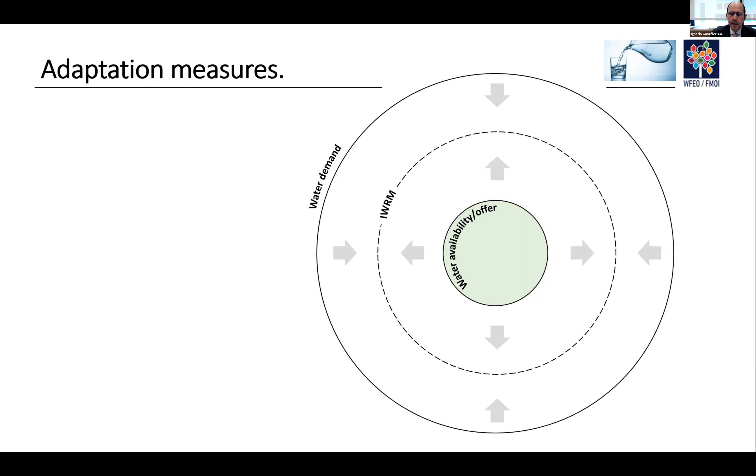If we focus on adaptation measures related to water supply demand, we can say that climate change will affect water supply in terms of availability, quantity, and quality. Demand will be affected mainly by world population growth and the consumption patterns of current development model. The balance between a reduced supply and increased demand can only be achieved through adequate planning and integrated water resource management. But going further into integrated management, it should also be multisectoral, including soil and land management.

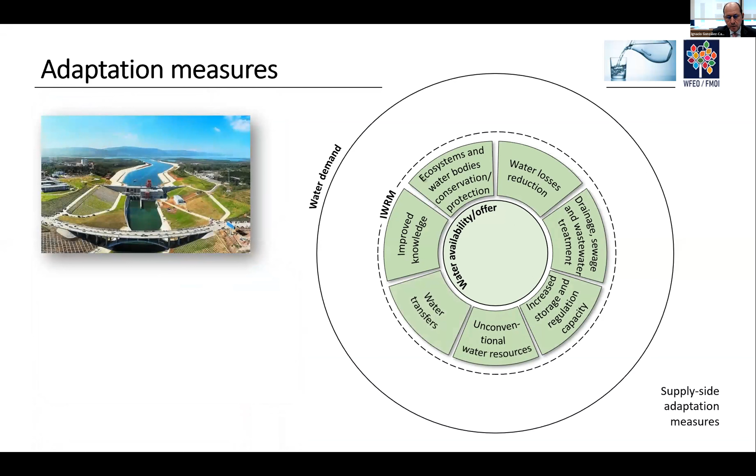7 supply-side adaptation measures have been identified: improved knowledge, ecosystem and water bodies conservation or protection, water losses reduction, drainage, sewage and wastewater treatment, increased storage and regulation capacity, unconventional water resources mainly desalination and reuse, and water transfers. Also, virtual water transfer is important here.

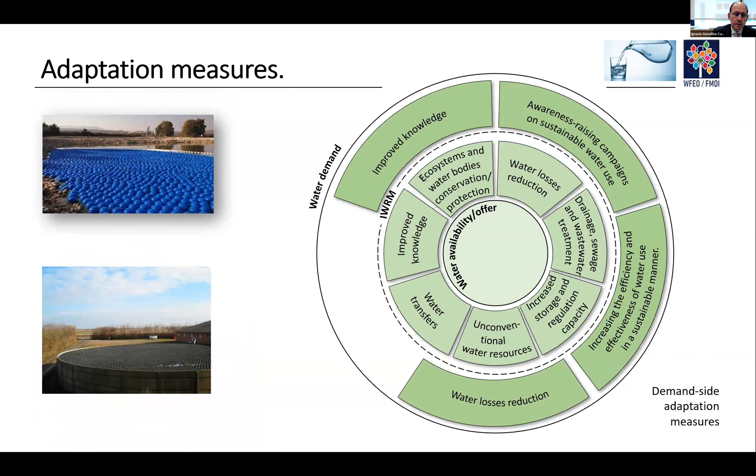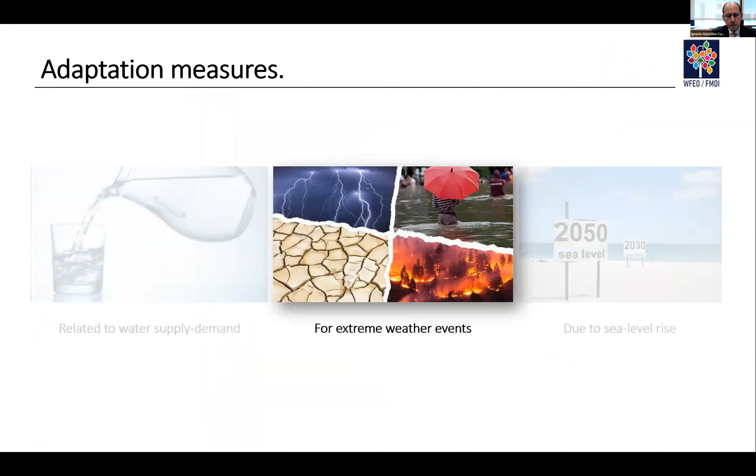5 demand-side adaptation measures are proposed: improved knowledge or increased knowledge, awareness-raising campaigns on sustainable water use, increase the efficiency and effectiveness of water use in a sustainable manner, water losses reduction, and disruptive breakthroughs that promote lower water consumptions. This last measure is perhaps the most important because these advances make it possible to decouple development from water use and increase the planet's biocapacity.

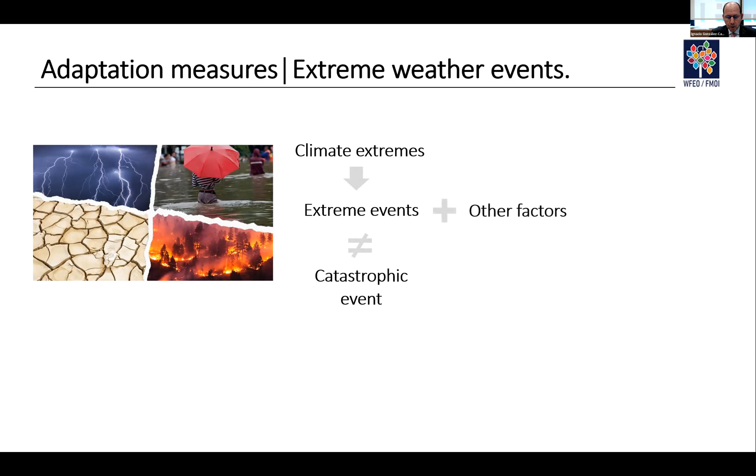Regarding the adaptation measures for extreme weather events, I just want to highlight that catastrophes are increasingly seen by society as the public face of climate change. Climate extremes cause extreme events, but whether a meteorological phenomenon is catastrophic or not does not depend exclusively on the extreme event value taken by the climate element. Other factors, mostly caused by economic and social reasons, are the ones that can condition the catastrophic nature of an extreme phenomenon.

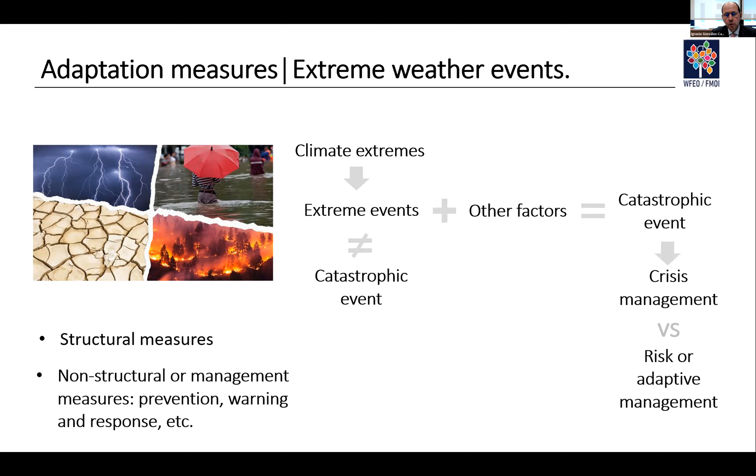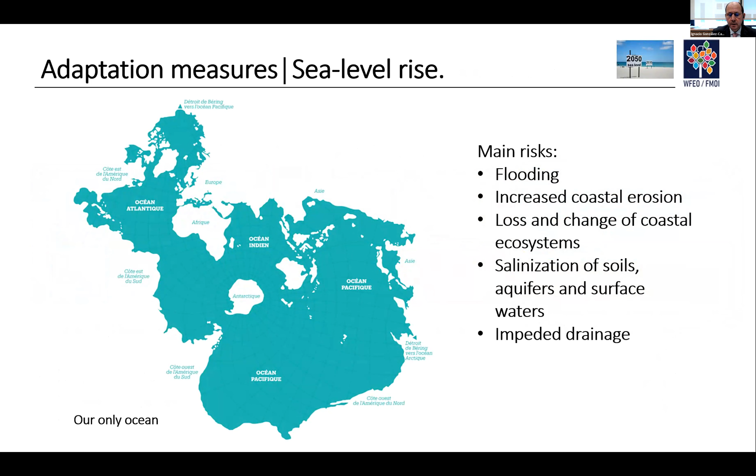Traditionally, these extreme events have been treated as an emergency or critical situations. These policies are changing worldwide, shifting from a crisis management approach to one based on risk and adaptive management. Floods and droughts must be addressed with structural and also non-structural measures, and it's also important to recover the connection between rivers and floodplains. More details can be found in WFEO publication Best Practice on Droughts and Flood Management Engineering Contributions.

The last measures addressed are those related to sea level rise. Given that sea level will continue to rise regardless of the mitigation measures undertaken, adaptation seems to be a priority. It should be noted that 10% of the world's population lives between 1 and 10 meters above sea level.

If we focus on small island developing states, it should be noted that in addition to facing rising sea levels, they also suffer from water insecurity that will increase in the short term. Therefore, international collaboration to address climate change in these sites is essential. We cannot forget that climate change must be a shared challenge.

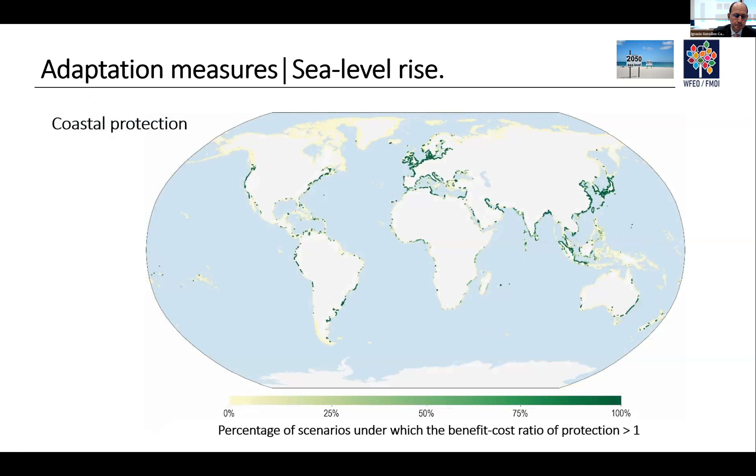Adaptive response can be categorized into four groups: coastal protections, advance, accommodation, and retreat. Usually these measures occur in combination with each other at the same coastal location over time. Coastal protection measures may be cost-effective for cities, but not affordable for rural or poor areas.

These adaptation measures bring multiple benefits, but we must build infrastructures from a different perspective, putting more value on the relationships with the rest of the stakeholders, such as the environment. Therefore, the design step is fundamental. We must design resilient and non-rigid infrastructures, identifying vulnerable areas and testing our proposals for adaptation to climate stress tests.

The circular economy of water is important, but it's also relevant to consider the life cycle of the materials we use, defining at the design stage the dismantling of the facilities at the end of their lifespan and their possible subsequent use or recycling. We are also committed to carbon neutrality, so we need to incorporate new solutions to transform the development model. Thank you very much, José.

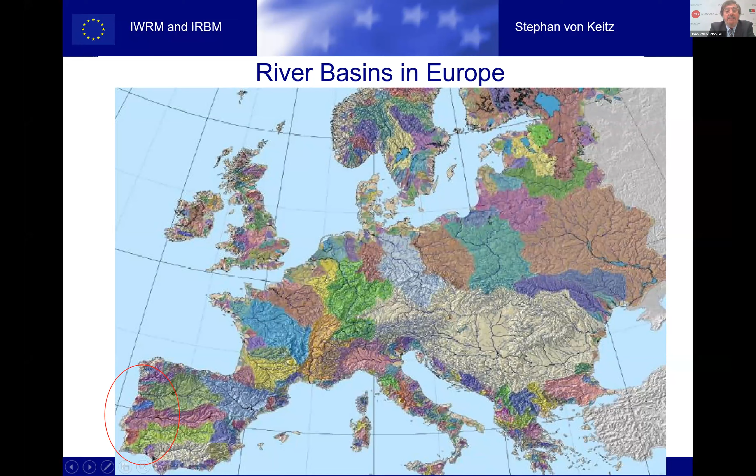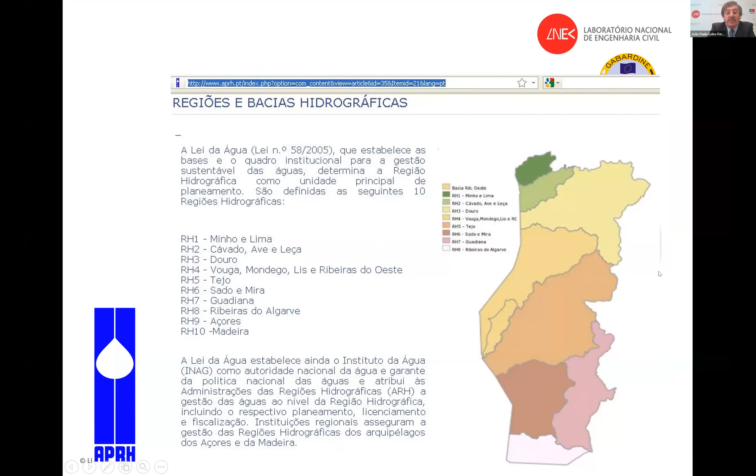You are seeing here the member states, and I will try to address this part of the Iberian Peninsula. This river here is the Tagus River, or Tejo, or Tajo in Spanish, Portuguese Tejo, in English Tagus. It's 1,000 kilometers long. Not just the river basins, but also, as we are sharing here for Portugal, several of our regions and rivers, some Portuguese only, others shared with Spain, but also groundwater.

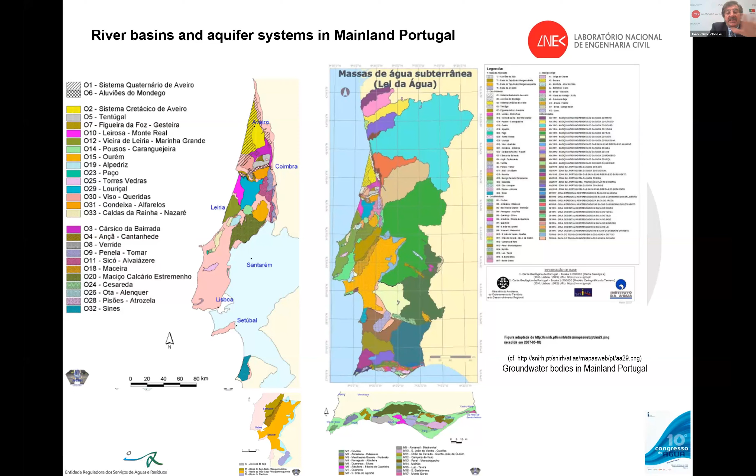So a lot of what I'm going to tell you today is related to water resources up in the open sky, precipitation on the ground, surface water, and also infiltrated groundwater. All that makes our groundwater circle. So we have like two-thirds of our country's fracture media, but we have one-third with large aquifers. This is the largest aquifer in the Iberian Peninsula, like 8,000 square kilometers in the Tagus left bank of the river.

You see here the region of the Tagus, Ribeiras do Oeste, financed by the European Union. What is interesting is that we have a role, a protocol, the guidance document 18, that says for all these water bodies, surface and groundwater, we are targeting to have an assessment, but also conclusions and rehabilitation.

Our target is by 2027 to have all groundwater and surface waters in a good status, both quantitative and qualitative. I've done my PhD in Berlin, so I'm a mathematical modeler.

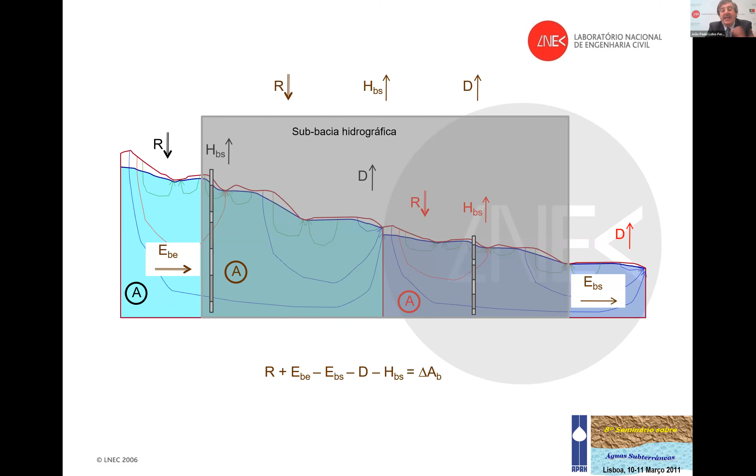You see here a watershed, with precipitation, groundwater, overflow, and runoff. What is occurring these days is the precipitation pattern is changing. You have much more concentrated precipitation causing floods and less groundwater recharge. So the availability of water is probably the same—the water will not go to another planet, it will stay on planet Earth. So planning is a fundamental issue so that we can do a good job by 2027 and later.

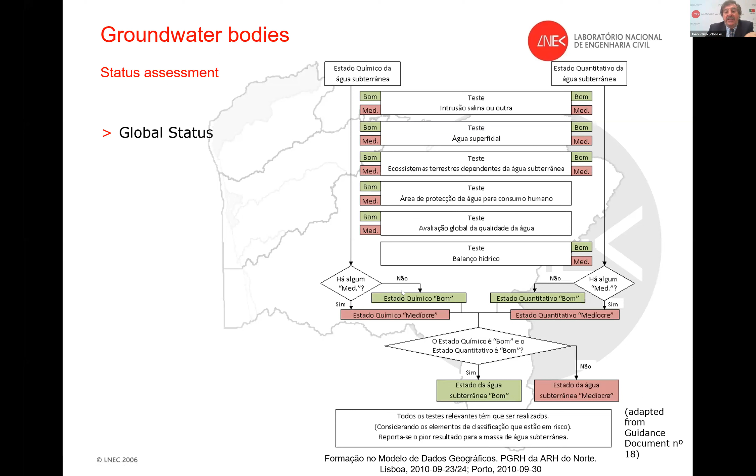So what is this guidance document saying? We're going to assess all the water bodies from the chemical status, like groundwater, or the quantitative status—as we've seen by Ignacio, you also test saline intrusion. Then you say if this water body is in good status of quality or not. If one of these tests is not good—water for consumption, global quality, water balance, if the groundwater is declining—then this water body, surface or groundwater, is not in a good state, and we have to do something to overcome this. This was the target of those plans.

Of course, we are doing that with data, structure, models that we have, and we address this in different types of issues. For instance, related to the Tagus watershed, we had like 1,500 wells where we have reached in depth, so in 3D, surface and depth, what is going on. Then you have some areas in red where you have a decrease of the groundwater table of more than 100 millimeters, and then we have to do something to see why this is happening.

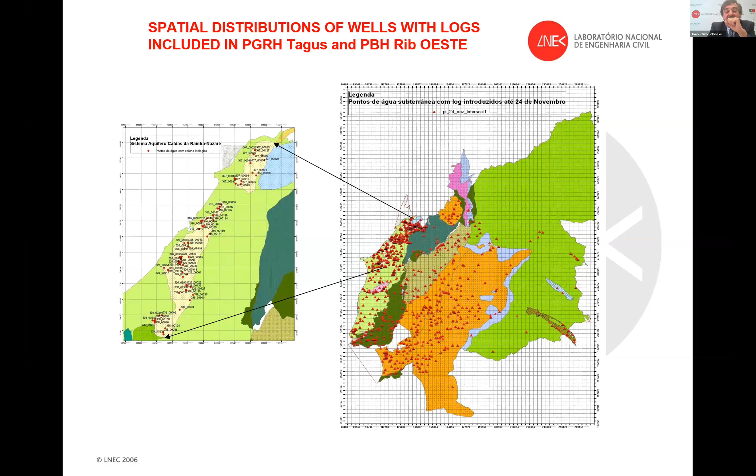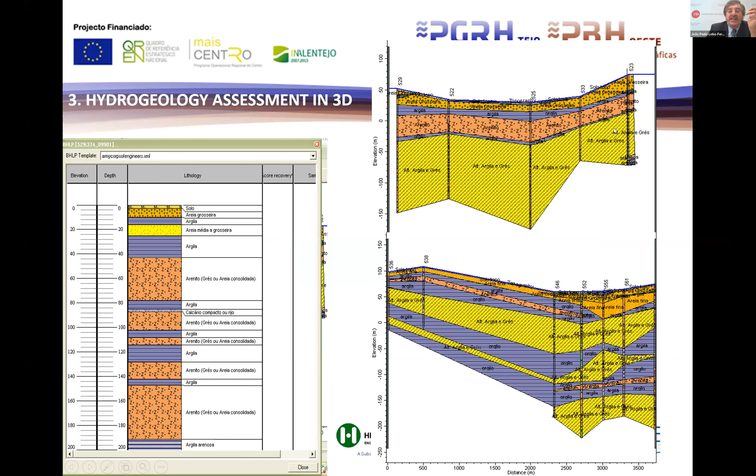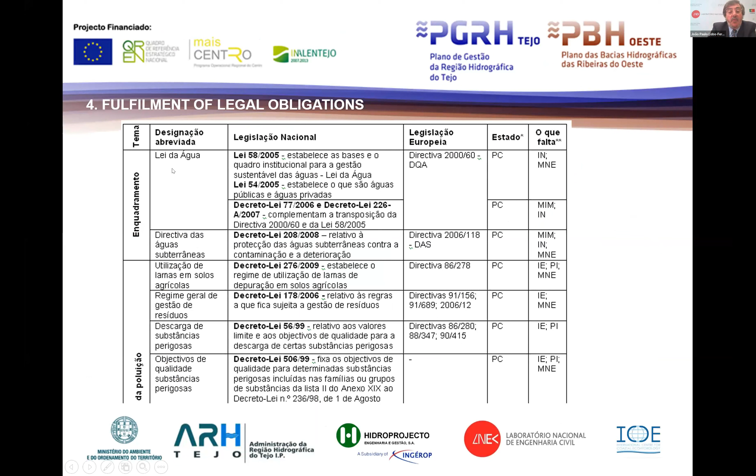You see here, for instance, different piezometrics, what's happening, and by the measure you say, if it's more than 3 centimeters per year, then you're not able to just keep business as usual, you have to do something. Of course, we are doing this not only on the surface, 2D, but also in depth. So in each one of these aquifers and aquitards, you assess where I'm measuring—on this large aquifer, or in a top aquifer—trying to see what is happening in this groundwater body.

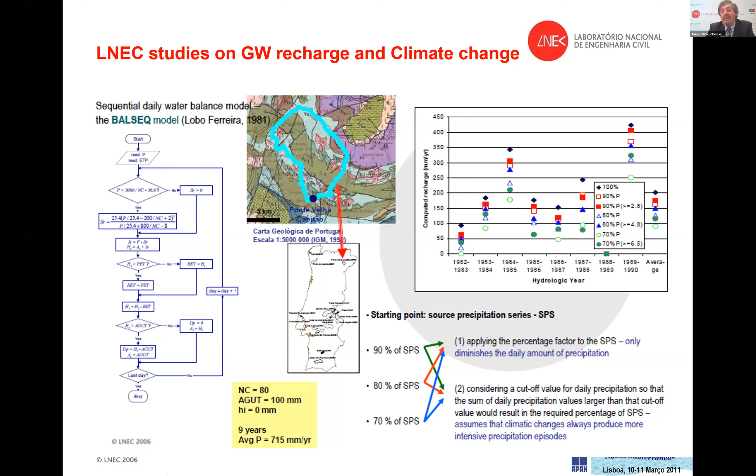You see here groundwater scenarios that Ignacio was showing us. We went further, and we're seeing by 2071, 2100, what is going to happen according to groundwater recharge, decrease or increase, due to precipitation events. Really the precipitation pattern is very crucial because it's raining heavily. The amount of water could be the same on average in the year, but of course it will cause floods and not so much groundwater recharge.

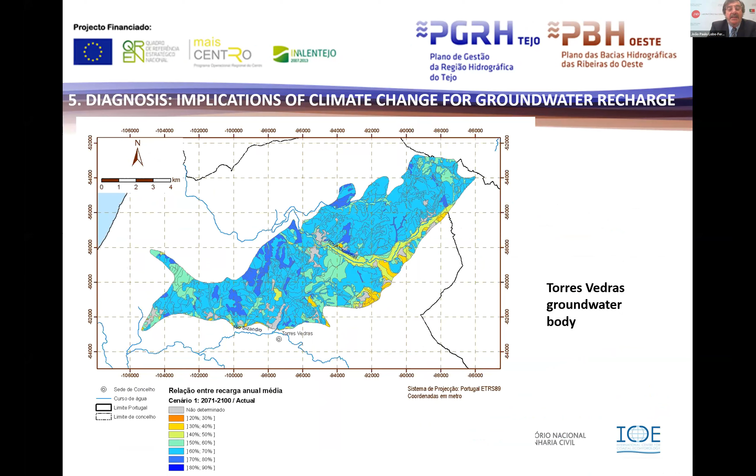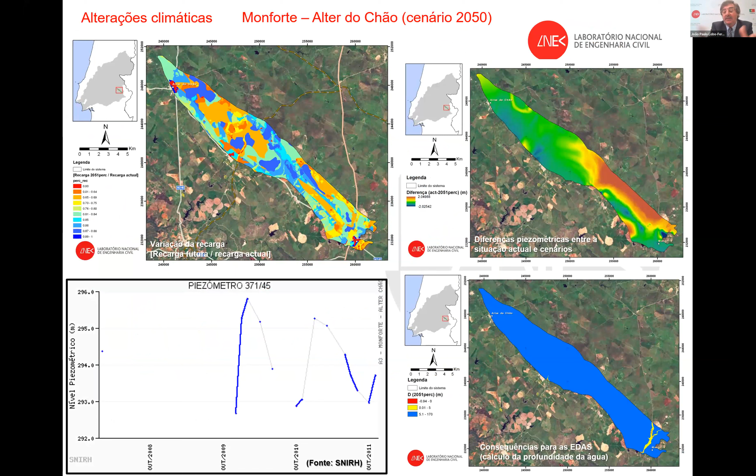So the precipitation pattern tells us, for instance, for 2071 to 2100, this aquifer, Torres Vedras, is in blue—meaning we're going to lose about half of the natural groundwater recharge. So we have to do artificial or managed aquifer recharge when we have extra amounts of water caused by floods, like the Australians, the Americans, and Israel are doing, because groundwater-dependent ecosystems will be affected. Groundwater level will decrease if we don't do that. We have seen empty lakes, totally empty, in Austria, which is a wet country.

But we also have to target the groundwater qualitative assessment—the quantity of pollutants inside, because we would like to supply water in good status. So for instance, in these alluviões do Tejo, this 8,000 square kilometer large aquifer, 1,000 meters deep in some areas, we have nitrates, ammonia, pesticides, and we are trying to see why this is happening. Is it agriculture? Is it a garbage field there?

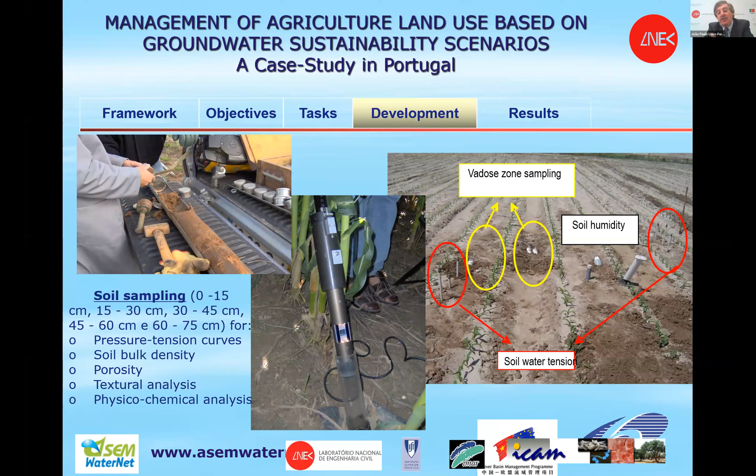So we have developed projects, sponsored, with cooperation from the EU and China, where we are targeting and putting our devices to see in depth what is going on in the real field—not in the lab, but on the field—where, for instance, instruments go up to 2 meters deep, and you're seeing what the farmers are putting there.

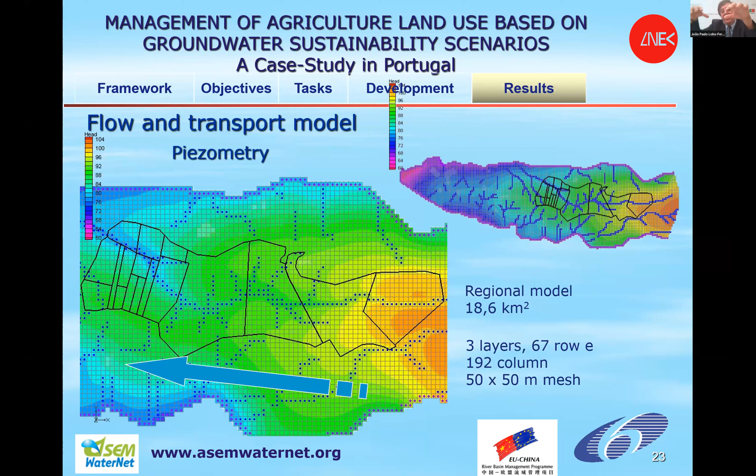If nutrients are in excess, they will not be useful for the plants and you pollute the groundwater. With mathematical models, we are targeting the eventual diffuse flow of water through groundwater, aiming to reach, for instance, nitrate levels of 50 milligrams per liter in groundwater.

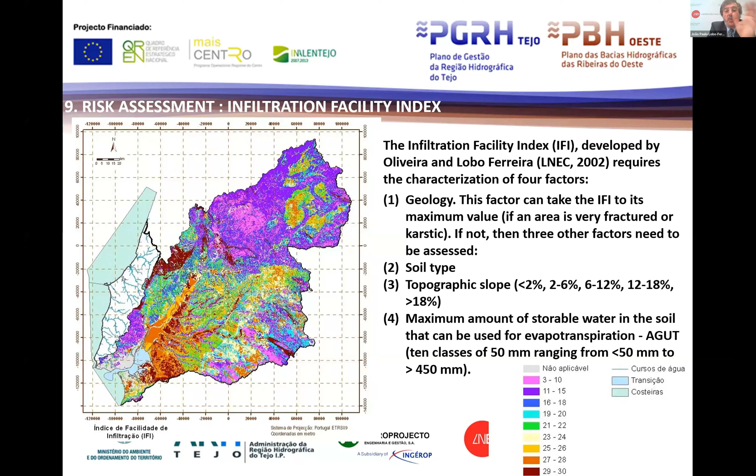Groundwater, agriculture, infiltration - we track where it goes. So we are willing to have all the status assessed.

Finalizing what I'm saying, we have tried to make different types of models, like an infiltration facility index. This is available online - the Oliveira and Lobo-Ferreira model - where you can see where you have to point out more strictly where the risk is high, like road pollution from car incidents, but also groundwater vulnerability to saline intrusion.

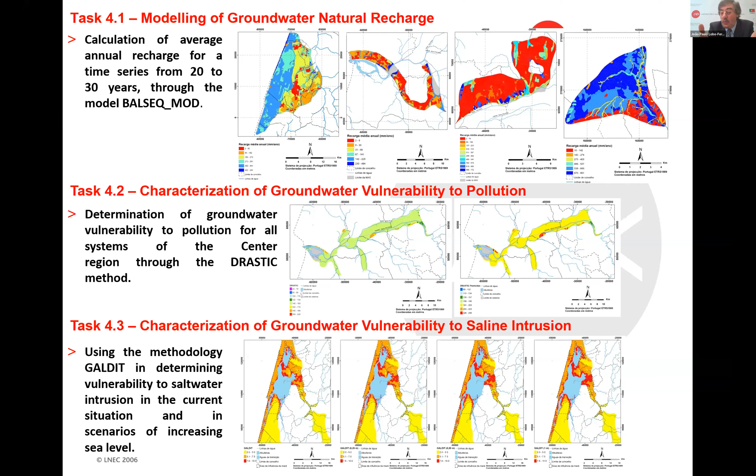I have developed, with a professor from Goa University, LNEC with Goa University, a method that is now being used all around the world - from Japan, Iran, Brazil, United States, Portugal, Spain - many countries are using this, trying to see if the water rises in the seas, which aquifers will be most jeopardized.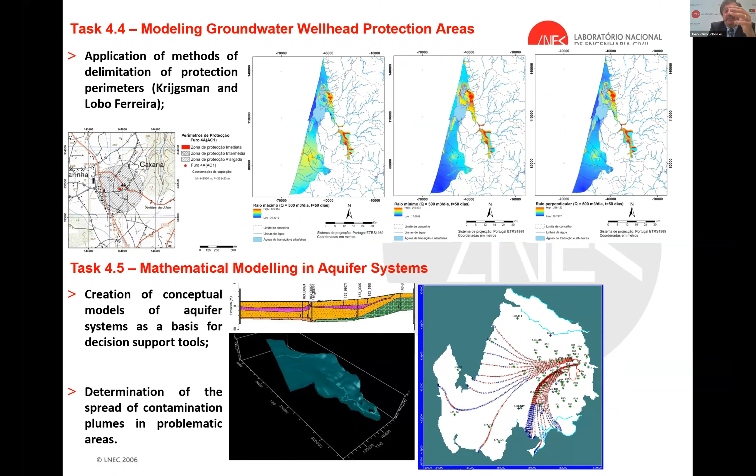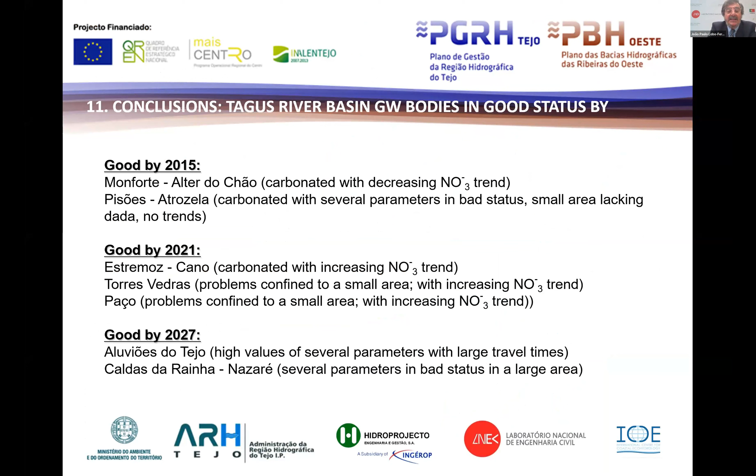This is a region in the north of Portugal, Aveiro, where we are starting to use a GIS to address this problem, precisely from the scientific viewpoint - what we are doing, and what Ignacio was saying before about our concerns: groundwater monitoring, groundwater recharge assessment, and trying to see if we have a landfill or a coal mine, if you dump waste there, whether it's eventually going to reach a groundwater pumping zone.

Concluding, the Tagus River Basin as an example - reports from 2012 said that by 2015 those aquifers would need certain measures, by 2021, and latest by 2027 all these groundwater bodies. We have basic measures on what to do, related with the regional directors of agriculture for Alentejo, Algarve, Minho, and so on.

So this is the contribution from science - scientific laboratories like LNEC, universities - and as I told you, all of this is available in that paper. So, obrigado, thank you, merci.

Okay, thank you very much, João Paulo, for your very interesting presentation, showing that engineers - not only scientists - can really do something to face this increasing pressure on what we call the hidden treasure that is groundwater. Thank you very much for your presentation. Now I will give the floor to Professor Innocent Nhapi.

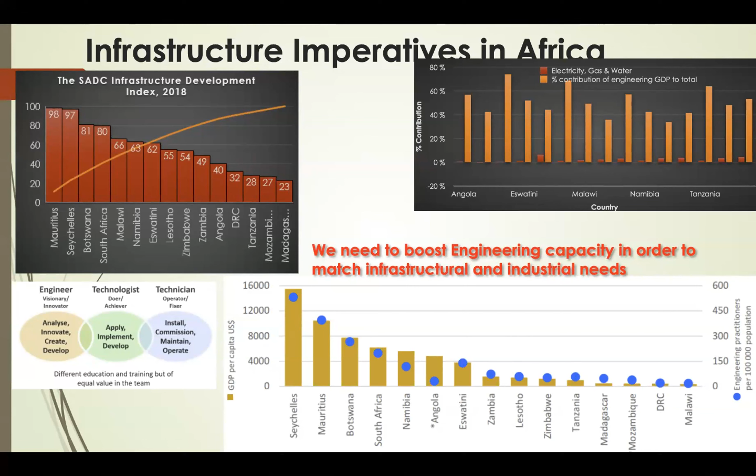So in terms of responding, we need to respond in a number of areas under engineering. Looking at the situation from 2020, where we had serious problems with cyclones and serious problems with COVID-19, it was decided that we focus initially on the water sector and come out with a strategy that can be upscaled to other engineering sectors like energy, mining, and manufacturing.

So it was decided that we will be targeting training people who are already doing their job, and then enhance their skills and competencies so that they can do their jobs better and increase their productivity. So action-based learning...

was chosen because it has a number of advantages, where we have management teams and we train the management teams working as teams, so that this training is not focused on achieving certificates, but is focused on competencies and improving competencies. Our primary aim was to close the gap by creating a critical mass of competent and committed engineering leaders at all levels who are able to deliver performance improvements in their engineering-based organizations.

This course that we developed, which was targeting water and wastewater treatment plants, was trying to address a number of issues that these plants face, which are to do with the knowledge itself of the systems, daily operations, and what a manager is supposed to do and what other workers are supposed to do as a team.

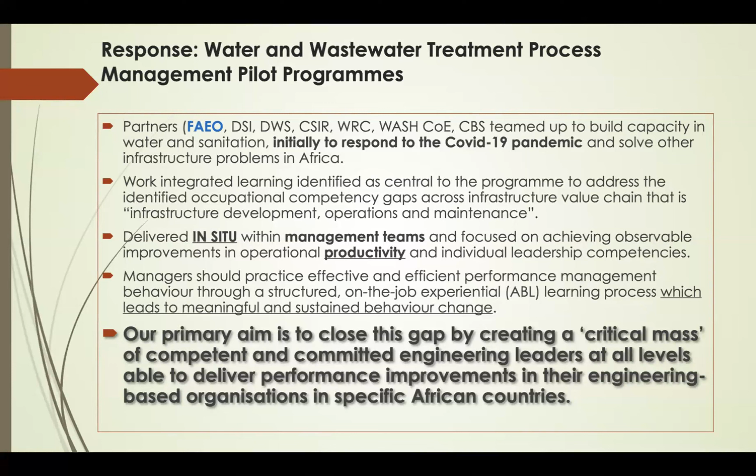The courses had course evaluation, and they received the certificate of competence against the certificate of attendance, because here they will be examined, and if they did not do well, we had to redo the exercise until they understand what they are supposed to do.

Next slide is just on the assessment that I've already talked about. But I want to go to the challenges that we faced.

You can see that even in my presentation, I faced some challenges in terms of virtual delivery mode. The network connectivity in Africa is still a challenge. It's desirable, but still a challenge.

Then also the level of participation and commitment on online courses was not as what we wanted, because online you'd find that sometimes people leave. You are always checking on the numbers - sometimes you've 10, sometimes you've 15, sometimes you've the maximum number.

The participant selection also - we wanted to emphasize on the teams. That's the most important thing in action-based learning, so that they work together, they identify the problems, they brainstorm together, they find solutions together. So it's an experiential learning process, which is best done as teams. And sometimes finding the teams when you have problems with capacity, where the organization doesn't have sufficient manpower, is also a challenge.

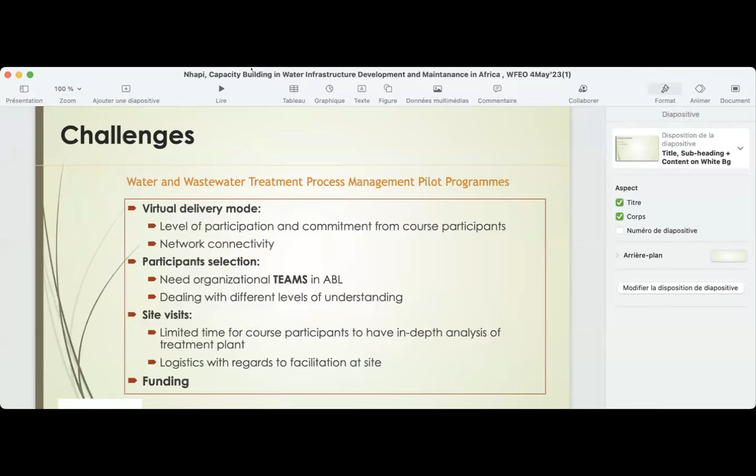In my... Well, I'm afraid that we have lost the connection with Professor Innocent Nhapi. Ivan, yes? Ivan? Yes, do you have... we lost Professor Innocent. Yes, please, Mr. Nhapi can disconnect and reconnect. Okay.

But I think that Professor Nhapi was finishing his presentation as well. Maybe we can consider that he's finished, and I thank Professor Innocent Nhapi for bringing to our webinar this most important issue about the lack of skilled engineers for sustainable development, mainly in the sub-Saharan region of Africa. Okay, thank you very much.

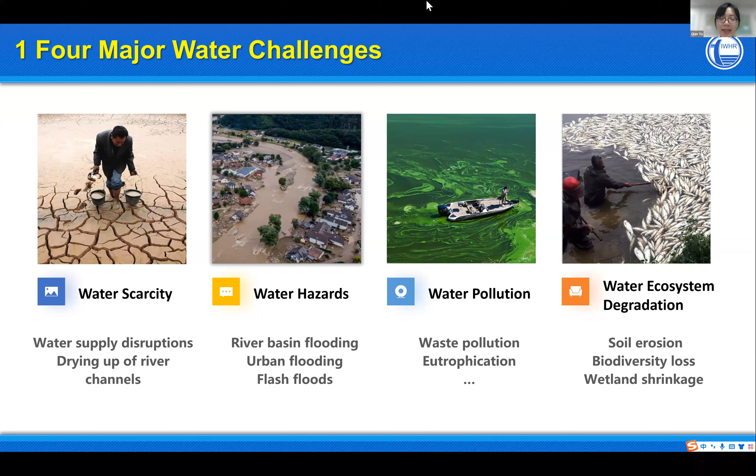I know all of these problems seem and sound very traditional, and I think most countries in the world also face similar problems. However, climate change just makes these problems more complex and more uncertain. Here I show you some figures from the latest report published by IPCC.

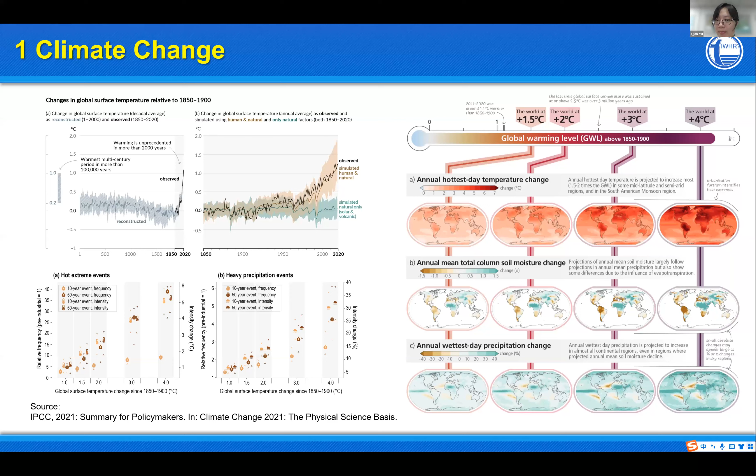You can find that the surface temperature is rising, and with the rise of surface temperature, the annual wettest day precipitation is projected to increase in almost all continental regions. I also show you some evidence for global climate risks, especially on water scarcity and flood risks. Climate change makes extreme heat and heavy rainfalls more frequent and more intense.

Also, droughts in some regions have increased. So our question is how to reduce the climate risks. Yes, the answer is adaptation and mitigation, but my topic today will mainly focus on adaptation.

Our next question is, how has China adapted to climate change through water engineering solutions? I will give you some solutions and cases in China. Before that, I want to show you China's water governance philosophy.

Through decades of hard work, China's government has done many efforts to achieve sustainable development, and we put forward a new development concept. It includes 5 parts: innovation, coordination, green, openness, and shared benefits.

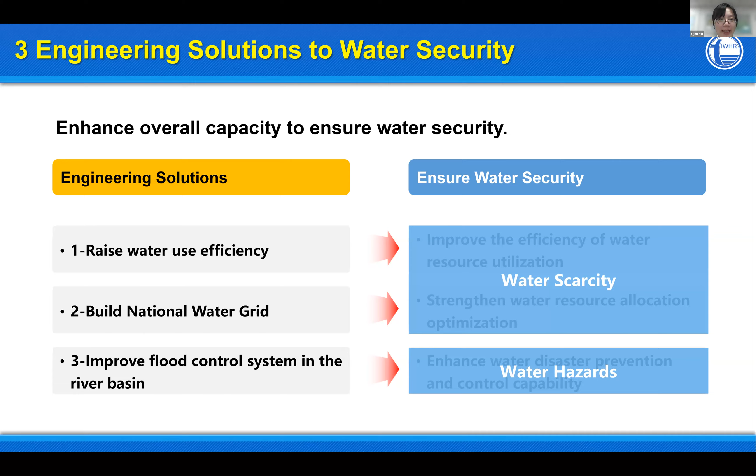The second case is building a national water grid to strengthen water resource allocation optimization. The last case is improving the flood control system in the river basin to enhance water disaster prevention and control capability.

So you can find the first two cases to show you how we solve the water scarcity, and the last case to show you how we solve water hazards. The first case is raising water use efficiency. As you may know, the spatial and temporal water and soil resources in China are mismatched, so irrigation plays an important role in food production.

After decades of hard work, we developed cutting-edge technologies and equipment like precision drip irrigation, variable rate sprinkler irrigation, and smart irrigation. We also improved water and fertilizer management and controlled irrigation in paddy fields. As a result, the irrigation ratio of arable land in China is around 51%, about 2.5 times higher than the global average.

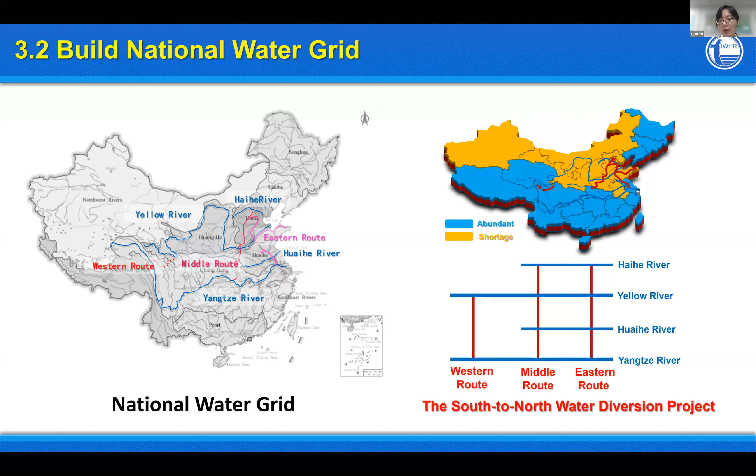To better allocate water resources, as you may know, the water resources in the south of China are abundant, while in the north, water resources are scarce. So China's government put forward a huge project called the National Water Grid. You can see in the figure it is composed of 4 horizontal lines: the Haihe River, Yellow River, Huaihe River, and Yangtze River. We also constructed 3 south-to-north water diversion projects to transfer water from south to north, and until now the eastern route and middle route have been established.

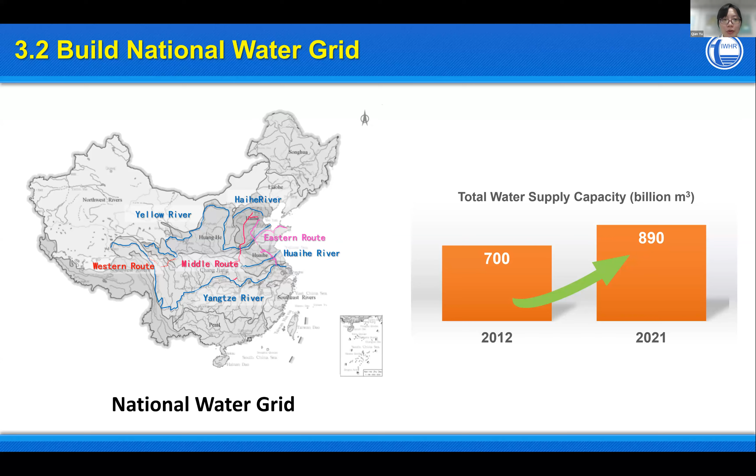Through these methods, measures, and projects, we improved the total water supplying capacity significantly. In 2021, the total water supply capacity was around 890 billion cubic meters.

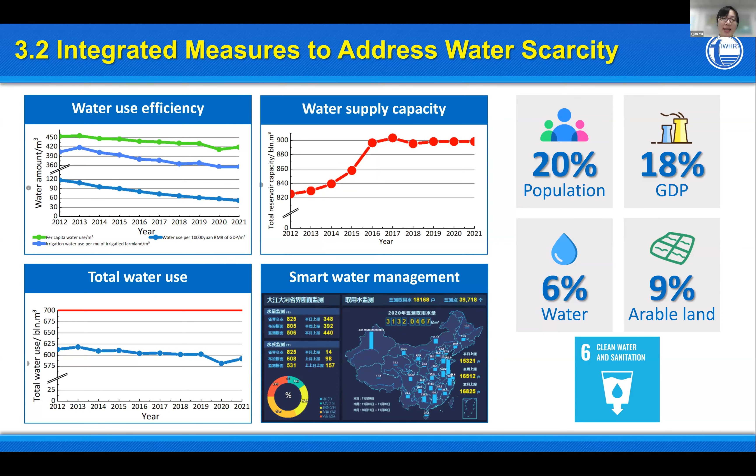In view of limited time, I've shown you 2 cases to address water scarcity. In fact, in China we take integrated measures. Besides increasing water use efficiency and water supply capacity, we also cap the total water use, and we develop intelligent, smart water management systems. As a result, we feed 20% of the world population and contribute 18% of the world GDP, with only 6% of the fresh water and 9% of the arable land. You can see we make a lot of efforts to achieve SDG 6.

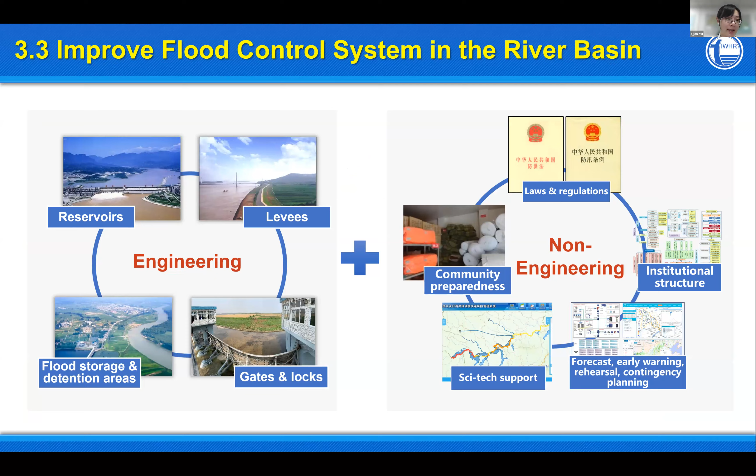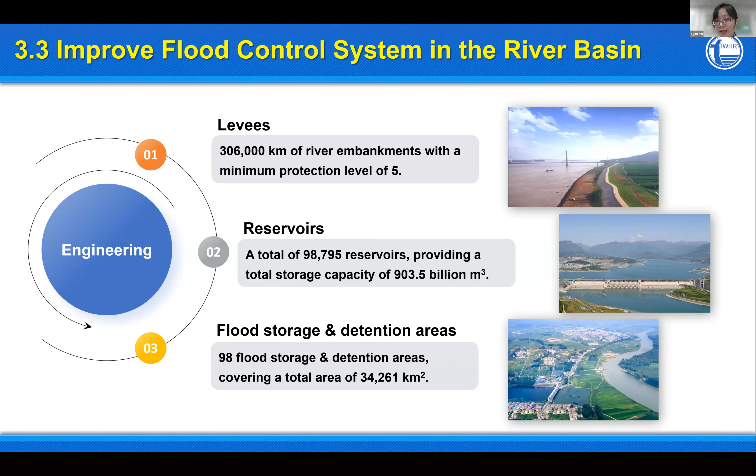For the second challenge, water hazards, we mainly focus on enhancing preparedness through engineering and non-engineering systems. Among the engineering systems, we established reservoirs, levees, flood storage and detention areas, gates, and locks. We have constructed more than 300,000 kilometers of river embankments, established a total of more than 98,000 reservoirs providing a total storage capacity of about 900 billion cubic meters, and established 98 national flood storage and detention areas.

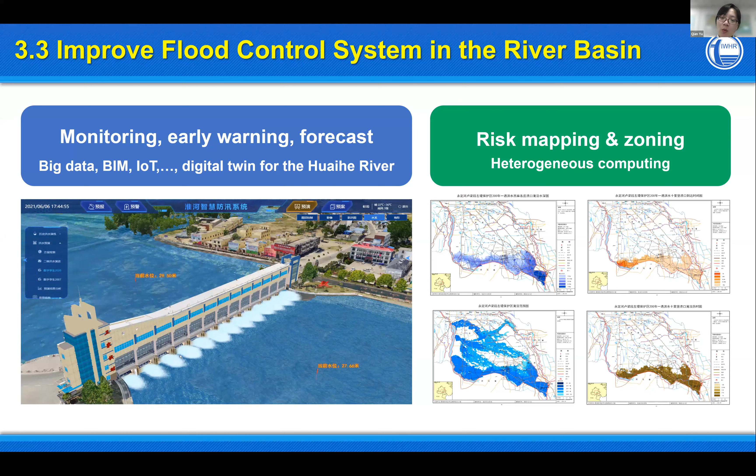For the non-engineering measures, the first important part is monitoring, early warning, and forecasting. This video shows how we use big data, BIM, IoT, and other advanced technology to develop the digital twin for the Huaihe River, which is tremendously useful for flood control for the whole river basin.

The second important part is risk mapping and zoning. We've done a lot of work to accelerate computing velocity using heterogeneous methods, combining CPU and GPU. We also publish the flood risk to stakeholders and help them do land use planning. The results are very significant.

Let's see, the last part is international solidarity. Among the 17 SDG targets, the last one is partnership for the goals - last but not least. IWHR is the largest research institute in China in water resources and hydropower. We host global secretariats or national committees of 10 international organizations.

We also provide water education for children in Asia and Africa, and help build clean water projects in rural areas in Southeast Asia. In conclusion, we believe engineering solutions are very important to achieve water-related SDG targets. We also believe we need to create stronger solidarity in achieving SDGs, which will deliver good for all.

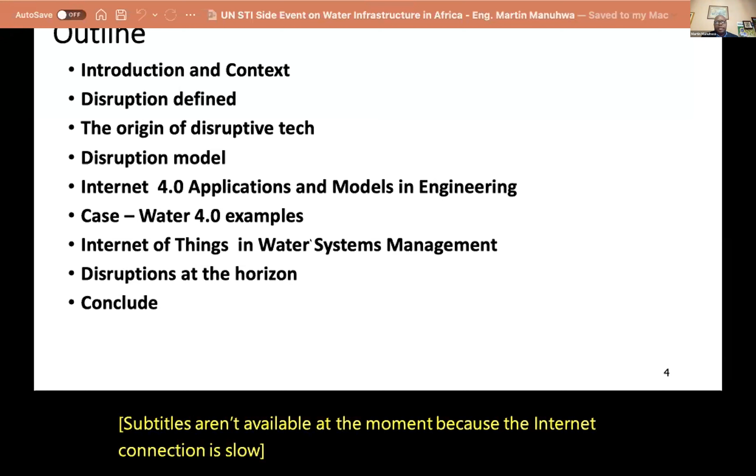My focus is on what we can do using technology, especially in Africa, to deal with the water shortage. A member of our committee ran a course in South Africa, Zimbabwe, and Namibia, where we are dealing with the infrastructure, municipalities, and capital issues that they face.

To achieve the Africa we want and accelerate delivery of the goals, we need to work in partnerships as well as apply technology in the field of water. Without engineering, the world is going nowhere, as engineering provides solutions to mankind's problems. So for us to achieve the 2030 agenda for peace, people, planet, progress and prosperity, we need to apply engineering technologies. Our committee was looking into how we can train and partner with colleagues.

I would like to acknowledge Ignacio, the Department of Science and Innovation, WFEO and FAEO for putting together this initiative that we started with a pilot of three countries, but we are going to expand.

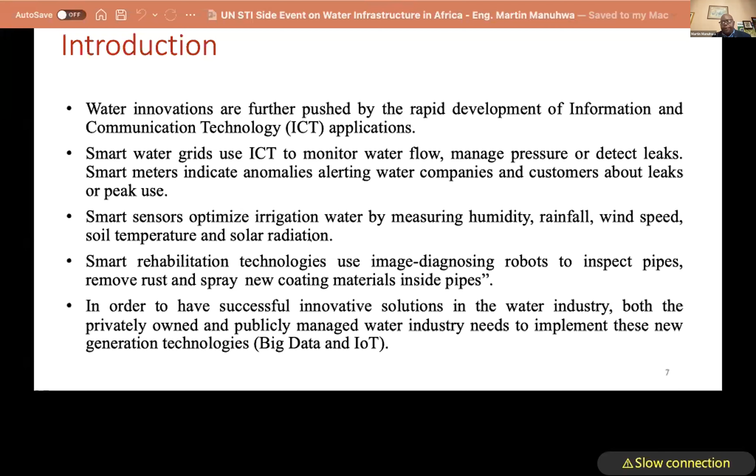Mr. President, you touched on this when you introduced the session, making sure the Internet of Things ensures there are sensors around water preservation and water solutions, such as sensors for irrigation measuring humidity, temperature, and many other parameters using big data analytics.

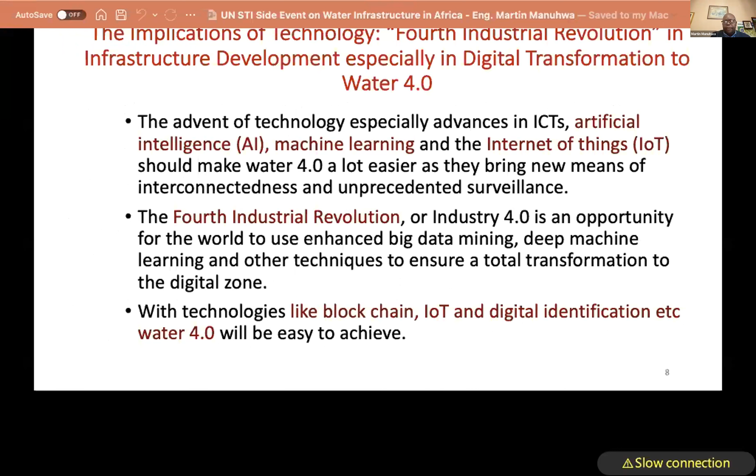So what we're doing together with CSIR South Africa is reaching out to the Water Committee and WFEO to ensure that we enlarge how we can use digital transformation in water delivery.

We're now going to use technology that is already set, and I think I will give a few graphics of what can be done in the 4th Industrial Revolution.

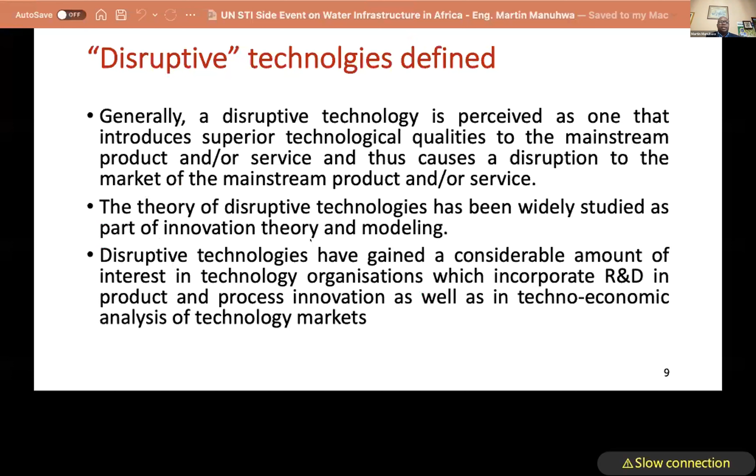These technologies have been so disruptive that if the world unites and works together, we can solve some of the basic problems our people have around water adaptation, delivery, distribution, and many other things to deal with climate change. Disruptive technologies will assist us to make innovations and build capacity in our engineers.

These technologies change the way we do things. Our forefathers did not leave the Stone Age because they ran out of stone, or the Iron Age because they ran out of iron. They found better, innovative ways of doing things, and we are going to follow.

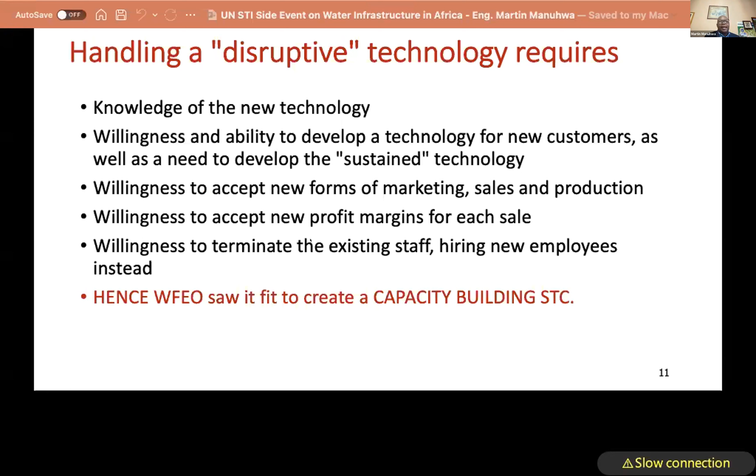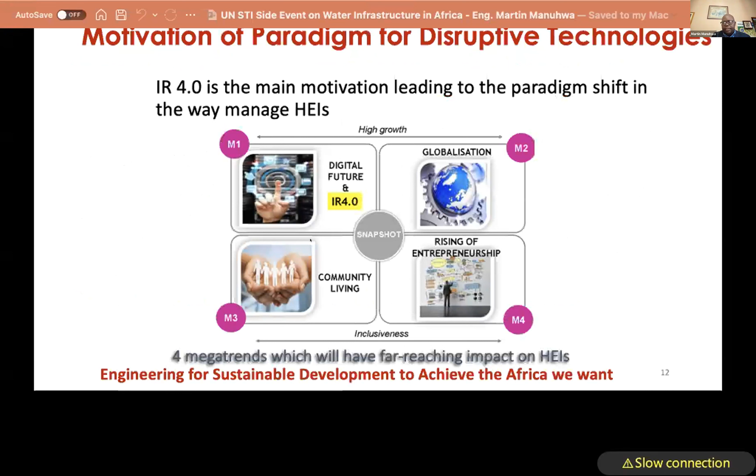So we need new knowledge. We need the ability to develop capacity, the willingness to accept new forms of technology, marketing, and sales, and we also need businesses to be more responsible, especially with artificial intelligence.

Hence our WFEO saw it fit to create the Capacity Building Committee. Again, we are motivated by this paradigm shift of disruption, where we are looking at the digital future spurred by globalization, community living, as well as rising entrepreneurship.

We've moved from the first, second, third, and fourth industrial revolutions—we are now on the 4th. The first two revolutions were to do with efficiency, doing things in more mechanical ecosystems, but the 3rd was more about doing the right thing.

Digital automated systems in water have now shown great impact using environments around Internet of Things, Internet of Services, and Internet of People, which have delivered smart water, smart grids, smart mobility, and smart businesses.

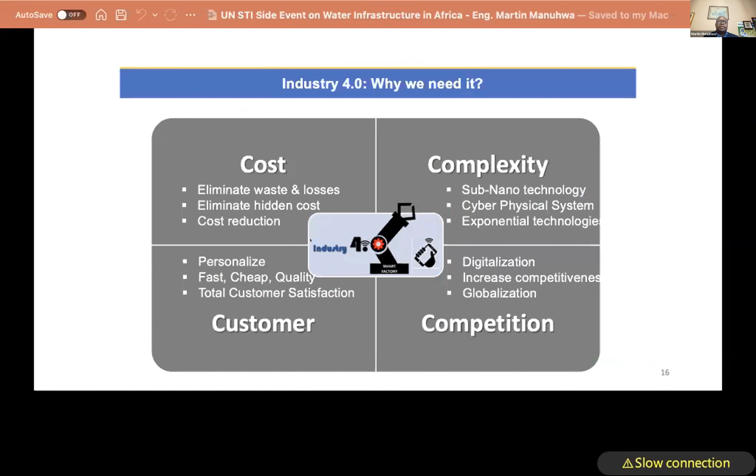With these pillars and technologies, which the president of WFEO spoke about, we are now applying them in research by practitioners in municipalities, for example using satellites to measure water quality, turbidity, and many other systems we have looked into.

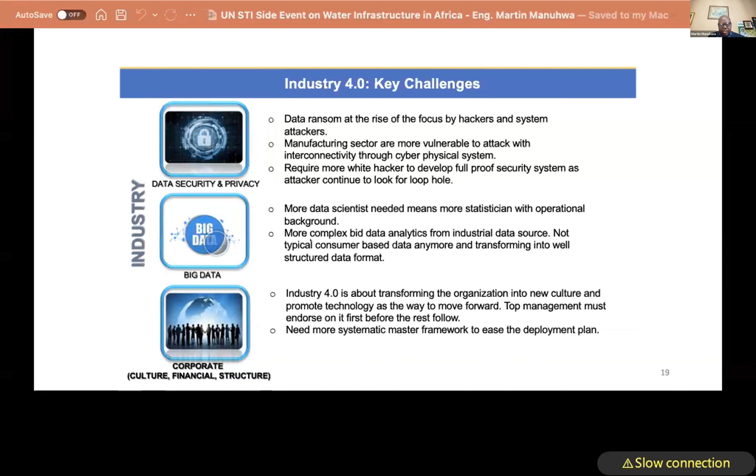We have created a framework which needs everyone to work together: industry, governments, professional bodies, the United Nations, the African Union, and many others, to ensure that we can look at the key challenges.

We will need more data scientists and more engineers, and this transformation requires us to change all our skill sets, our policies, and our culture.

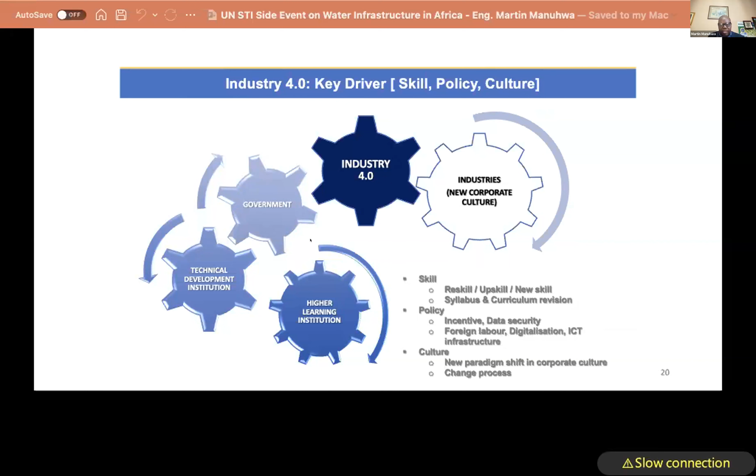We're then going to look at technical development with WFEO, higher institutions, education, and governments having to craft this for us. One, is... two, infrastructure maintenance must be automated, and three, we need an environment for data and Industry 4.0.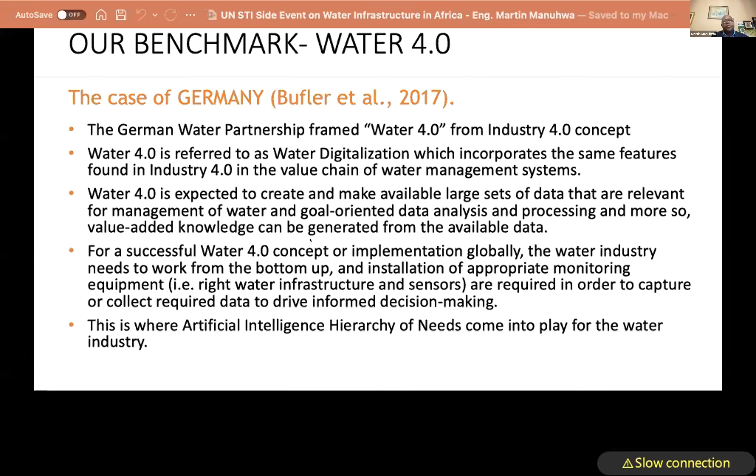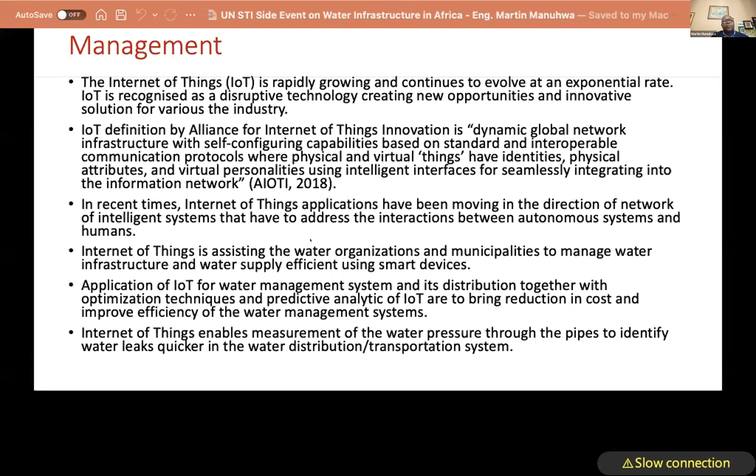And we did our benchmark with Germany's Water 4.0, where they have looked at creating, through big data analytics and many other things, leakage detection, and so many things that we are looking at and training our people.

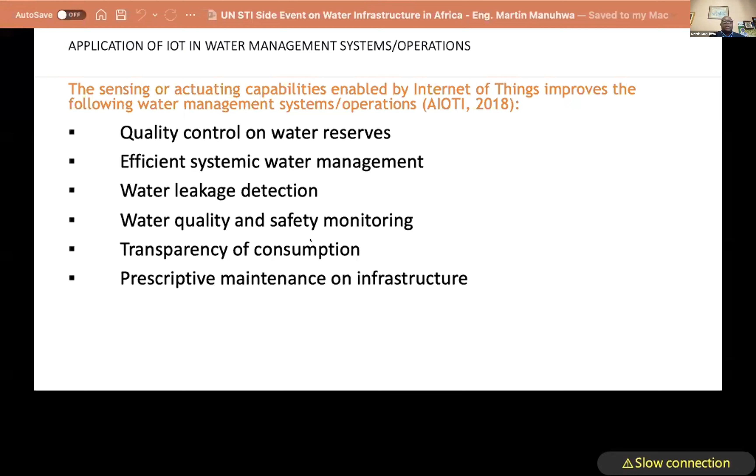Again, this application of Internet of Things is so exciting for us, and we have more research papers. Mr. President, when you come to the Africa Engineering Week in South Africa, we will showcase some of the outcomes of this. So we need to be doing water quality control on water reserves, efficient systemic water management, water leakage detection.

Because of limited time, I will not go into details, but just to recommend that we should commit further development of capacity to increase the number and quality of engineers, technologists, and technicians to meet these standards that we require. And after our pilots, we are so convinced that we can now deploy this training throughout Africa, South America, and other regions.

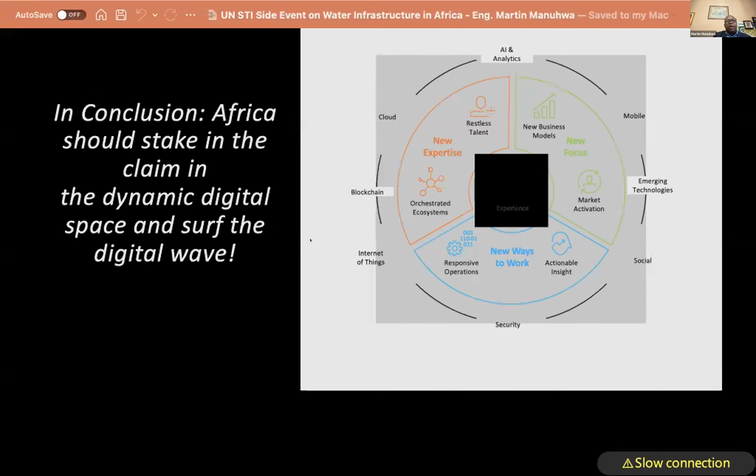And I'm happy Qian Yu has asked for partnership. And of course, we have already partnered with SADC, the South African government, many universities here to expand and explore and share knowledge.

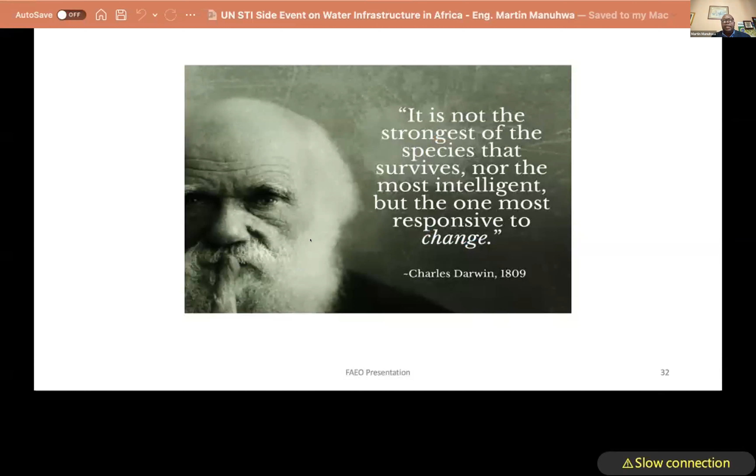We then also commit further to ensure that we move and take Africa, especially Africa, because of the dedication to this UN STI Forum, to the next level of digital expansion and also solutions to our water program.

Mr. President, I thank the organizers, Ignacio, yourself, and the UN for this opportunity to give a small snippet of our project under the capacity building of your WFEO as the president. And in Africa, we always say, if you want to go fast, go alone. If we want to go far, let us go together. I thank you, thank you very much.

These are our partners in the project that we are doing under the WFEO capacity building and FAEO capacity building DSI project. I thank you.

Okay, thank you very much, Martin, and congratulations for your presentation that once again highlights the very crucial issue about having well-trained engineers for Africa. That is a key factor for the development of this continent and these regions. Thank you very much, Martin.

Now I will proceed giving the floor to Dr. Chee Meng. Dr. Chee Meng is the Chief Engineering and Technology Officer at PUB, Public Utilities Board, Singapore's National Water and Coastal Protection Agency. Dr. Pang Chee Meng, the floor is yours, please.

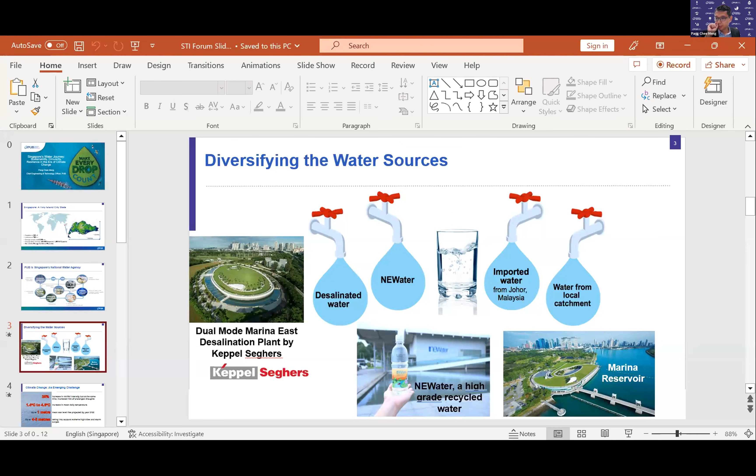In this particular case, we produce desalinated water using membrane technology. One of the latest plants we have employs dual mode membrane technology, whereby we either tap seawater or fresh water, depending on the tides, to lower the energy costs of seawater desalination.

But notwithstanding having addressed some of these water challenges, we feel that there's a looming crisis, which is climate change. It has particular impact on Singapore because the main problem is that climate change exacerbates the extremes. On one hand, we are projecting a 25% increase in rainfall intensity, but at the same time, we also face an increased risk of prolonged droughts.

In terms of temperature, we are foreseeing a 1.4 to 4.6 degree increase in mean daily temperature. These, of course, have a corresponding impact on the water demand by households, as well as industry, which we project to increase with increasing economic development.

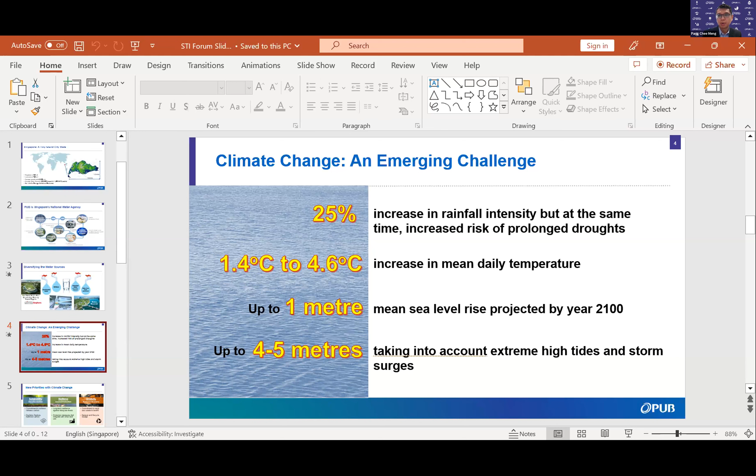In terms of sea level rise, we see a 1 meter rise in mean sea level by year 2100, but that is mean. If you take into account extreme events such as high tides and storm surges, the increase in sea levels can be up to 4 to 5 meters high. So what this means is that we have to prepare for a future that is more uncertain, and we need a lot more resilience in our water system.

I would like to chart maybe three new priorities that we have for our organization. We are seeing that we need to ensure sustainability, circularity, as well as resilience in the face of change. We are planning and implementing a number of innovative and adaptive technologies and strategies to overcome some of these challenges.

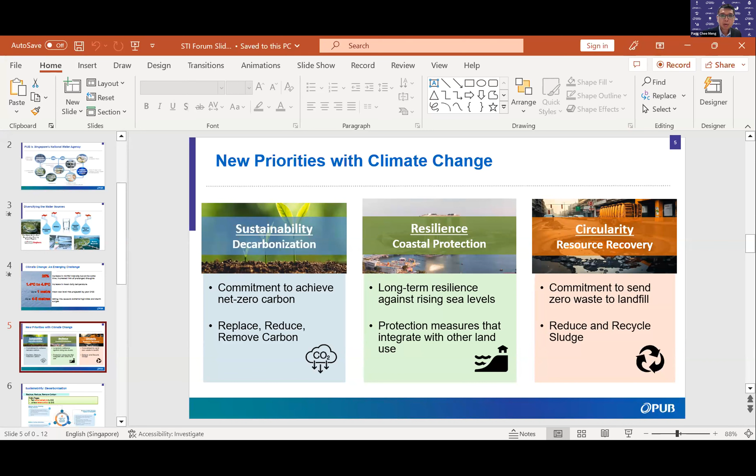In terms of sustainability, we are charting a path towards a system whereby we are decarbonized, achieving net zero carbon emissions in our operations. In terms of resilience, a large focus will be on coastal protection. And in terms of circularity, we hope to achieve resource recovery so that we will be sending zero waste to our landfills.

I will talk briefly about some of these initiatives. First, on sustainability and decarbonization, we have a plan to peak our carbon emissions by 2025, and in the longer run to achieve net zero carbon by 2045. We hope to achieve this through a 3R strategy, incorporating the replacement of carbon-emitting energy sources with renewable energy.

This is to reduce our energy consumption, and thereby reduce our carbon emissions through having more energy-efficient water and wastewater treatment processes, as well as reducing the energy required for seawater desalination.

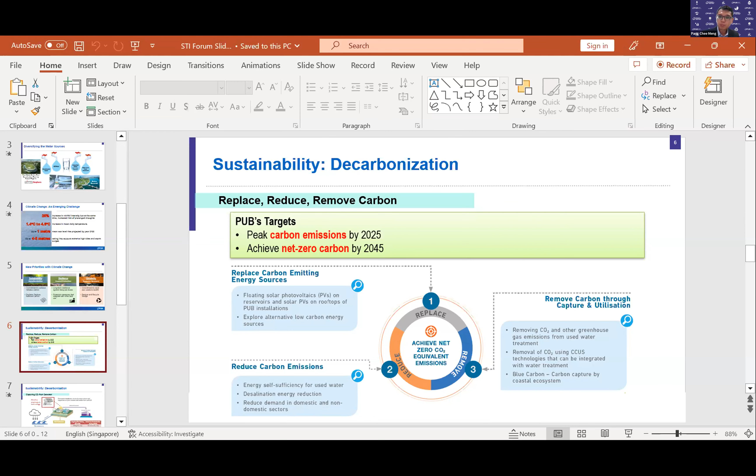In terms of removing carbon, this is to really remove carbon from the environment so that we can abate some of our carbon emissions that are hard to remove through other means. This will require us to perhaps sequester carbon from the environment so as to gain some form of carbon credits.

An example of such a decarbonization, or removing carbon from the environment, type of perspective comes from the use of alkaline electrolysis technology. In this case, we are running a large number of desalination plants, and we also know that the ocean is a large sink for carbon dioxide. If we can incorporate this alkaline electrolysis technology ahead of our desalination plant, we will be able to sequester carbon dioxide from the ocean and produce solid carbonates.

This would in turn allow us to achieve some form of carbon abatement. At the same time, the seawater will also be softened since it's depleted of calcium and magnesium, and this will allow us to desalinate the water in a more efficient manner. So we have ongoing pilot trials to test this technology, and we hope, if overall successful, to scale it up in the year 2026.

In terms of resilience, we have a three-point approach to coastal protection. First, we hope to rely on a holistic risk assessment using science-based approaches to forecast storm surge events. In terms of flexibility and adaptive design, we are building our coastal protection measures incrementally over time, so they will have to be adaptive and flexible to cater to the uncertainties of current climate projections. In terms of integrated planning, we are talking about multifunctional use, whereby our coastal protection infrastructure can be dovetailed with other land uses.

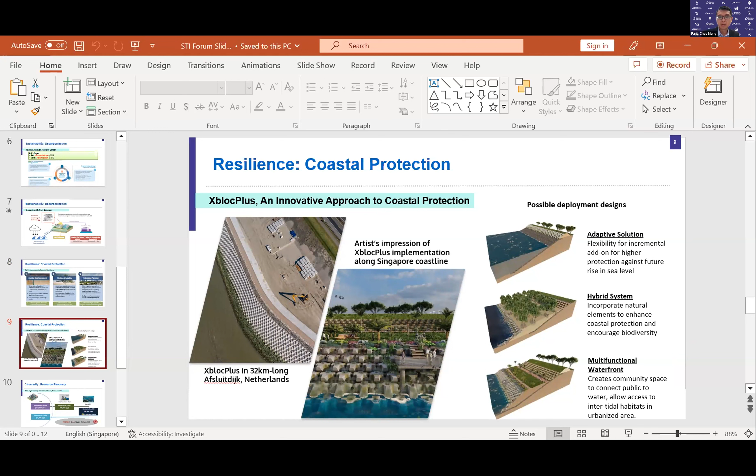An example of this is to use XblocPlus. XblocPlus is a Lego type of cube used in the Afsluitdijk in the Netherlands, which is a major dam to protect against the sea. This Xbloc will stack up one on one like Lego, such that they form a contiguous layer of coastal protection defenses along our sea coast. Some of the possible deployment designs are shown in this particular slide.

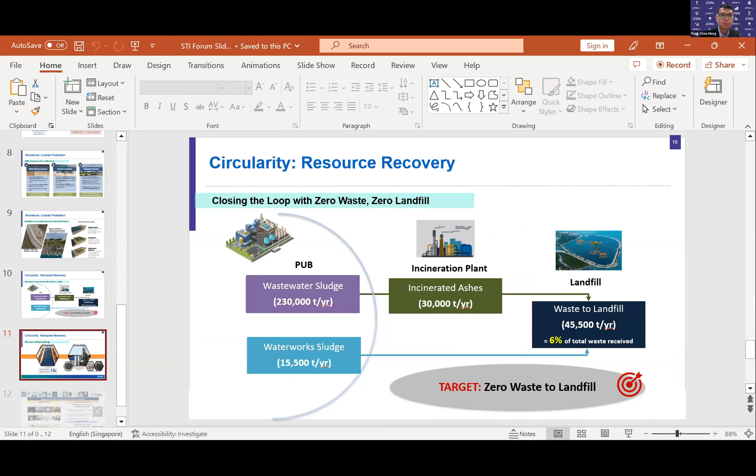Lastly, on circularity, our aim is to really achieve zero waste to landfill. Currently, we are contributing about 6% to landfill after incineration of our wastewater sludge. This is not sustainable because this is the only landfill left in Singapore, and we have a longer-term plan to try to achieve zero landfill. We hope to do this through two methods. One is to reduce sludge coming from our waterworks by replacing our conventional alum with a ferric chloride type of coagulant.

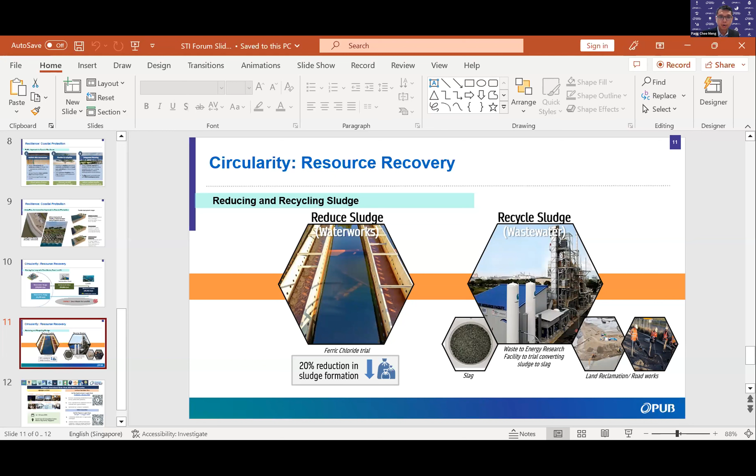Secondly, we have to also deal with the wastewater sludge itself. The sludge, after anaerobic digestion, would be subjected to further gasification to convert it to slag. Slag is a form of glass-crystalline particle that is able to incorporate many of the contaminants from the sludge, such that it can be put to beneficial use, such as in land reclamation and roadworks.

Obviously, some of these technologies are difficult to achieve on our own, and we work with multiple partners. One way we encourage collaboration is through the Singapore International Water Week Forum, with a number of events scheduled to take place in June next year. The call for nominations for the Lee Kuan Yew Water Prize is currently open, and you can scan the QR code for additional information. At the same time, the Water Convention, a conference, is also open for papers until the 26th of April. With that, I thank the organizers for the chance to speak at this important forum.

Oh, am I totally lost?

José, your mic is off.

Yes, I'm sorry. Thank you very much, Dr. Pang, for your presentation with very interesting advances in controlling these climate change impacts in Singapore.

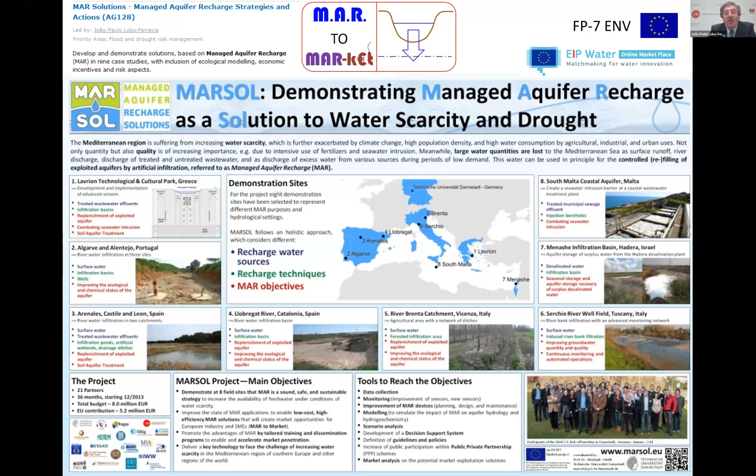All this is really available on the net. If you go to www.marsol.eu, you'll find the mathematical modeling we did there, and that's also another question in the chat—the Excel files about mathematical models. We have precisely a white book on mathematical modeling for managed aquifer recharge, like this one. So really, we are trying to interconnect different parts of the world, like China, and also the Portuguese-speaking countries, like Angola, Mozambique, Cape Verde, Brazil, where we have addressed this. If you go through Ignacio or the WFO, I can manage to provide this type of solution.

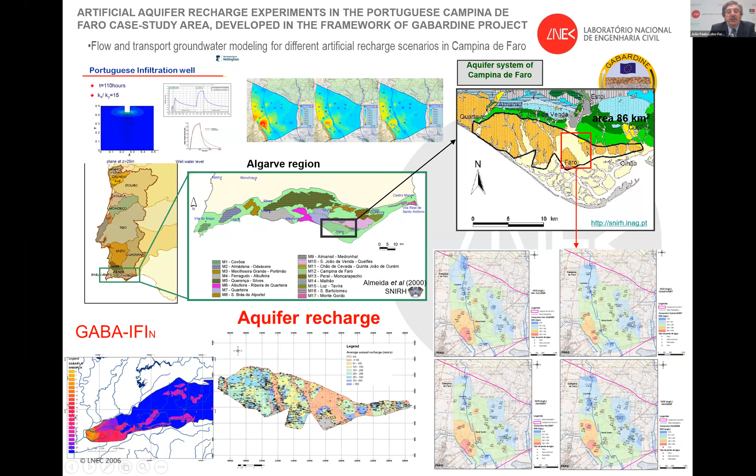In December last year, the Portuguese Parliament made a suggestion to our government to implement this. Of course, you have to consider the quality issue, not to jeopardize the quality of the groundwater through the injected water. This is a must to avoid further pollution, but it's a good example and we are able to do that.

On the other question about the Tagus River Basin Management Plans, we are using different types of models available worldwide, like BALSEC, for precipitation, runoff, and groundwater recharge, using MODFLOW. We are doing a lot of cooperation and we are able to do that further.